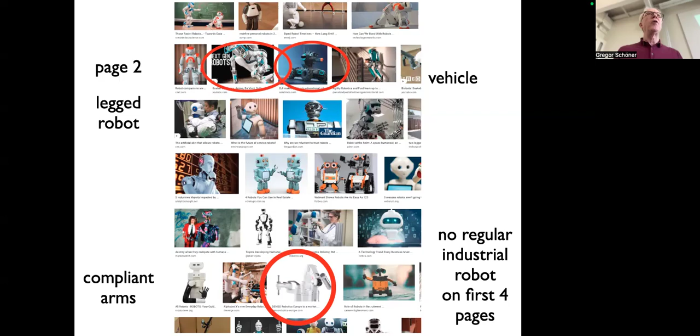And of course, most robots in the world are industry robots. That is, not autonomous robots. I'll say more about that. The huge majority in these autonomous robots are very special subfields. And this course is about autonomous robotics. I'll talk about that in a little bit. But that just shows that this robotics idea is very much tied to human-like behavior in the popular culture, right? And that's what people think, like these movies and so on.

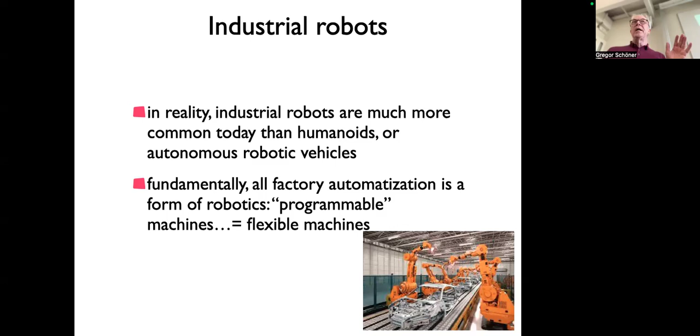And originally, the word even comes from a play, where somebody imagined a human-like agent that would look like a human, behave like a human, and so on. So this is part of the fascination always of this topic. It's not very much the reality. Now, this course is about autonomous robots, and they're not human yet, but they are sort of a theoretical answer to problems in artificial intelligence.

So industry robots are programmable machines. That was the feature, that they are flexible by being programmable rather than having a fixed function. But the information is given to these machines by the programmer, right? They don't have perception of the world. They're not basing their action on their own sensor information. For instance, the robot arm in the production chain would move to a location, and whether the part is at that location or not is then up to the factory engineers to make sure.

We had a project many years ago with Daimler, the Mercedes-Benz company, where the autonomy consisted of the robot arm having a little bit more tolerance for how precisely the part is positioned. So they had some camera, and then if the arm was like a centimeter off, they would compensate for that. That was then their notion of autonomy, very limited.

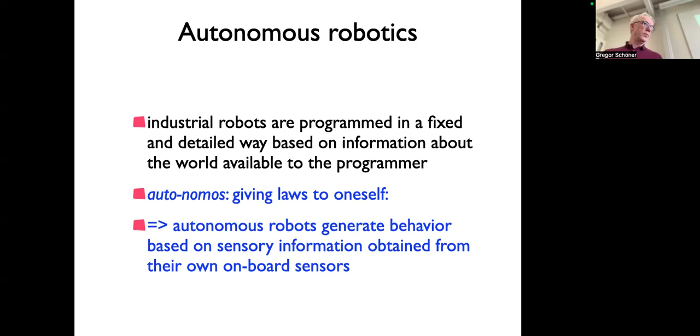So autonomy, the word comes from, nomos is law, giving yourself the law yourself. And what it really means is the notion that you're generating action, behavior based on your own sensory information, typically on board, from sensors, and you decide about your action based on that sensory information about the world. Now, again, this is ultimately part of the artificial intelligence vision.

So, for instance, the classical textbook of AI, Russell Norvig, the standard textbook in that area, has in the introduction this sentence here, that the unifying theme of AI is the idea of an intelligent agent, an agent that receives percepts from the environment and performs action, which would be an autonomous robot, right? That's sort of the original vision, even though in practice it's not always been like that. So yes, autonomous robotics is part of AI in that sense, right? But as you will see, it has more than AI systems because it has all these physical aspects as well.

Now, that is easily said, but if you look more precisely, then some of you engineers know there's autonomous control, which is the idea that you physically influence a mechanism based on sensor information, right? And actually almost every aspect of control has that feature, that it has sensors and controls based on sensors. So that's not supposed to be autonomous robotics. That's supposed to be just control. And so roughly speaking, this means that the autonomy in autonomous robots is supposed to go beyond that. And that's not entirely easy to formalize.

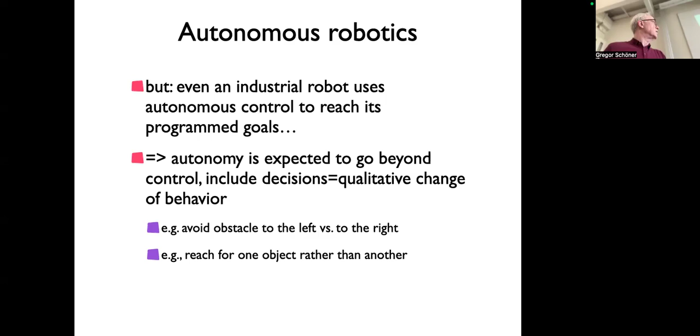And selecting the object that you reach for, that will be a decision. Well, if you're just looking at one object and you're controlling the precise grip, then you would say, well, maybe that's control. To formalize that more generally, again, is a little bit difficult, but that could be maybe the most elementary form of distinguishing between that. So that's what we're talking about.

There is perhaps often an intuition, like these humanoids and the robots in the movies, where that autonomy goes very far, and the robot does whatever it wants, right? And that is actually not at all what actual autonomous robotics is about. Actual autonomous robotics is about giving the robot tasks, not the robot figuring out itself what to do.

We actually, in one of our industry collaborations, we had these people saying, "Oh, you're crazy! The robot decides itself. We want to know everything the robot does and have control over everything." But maybe it can have a little bit of freedom, and if you look at it that way, then the robot needs to get commands that give it tasks.

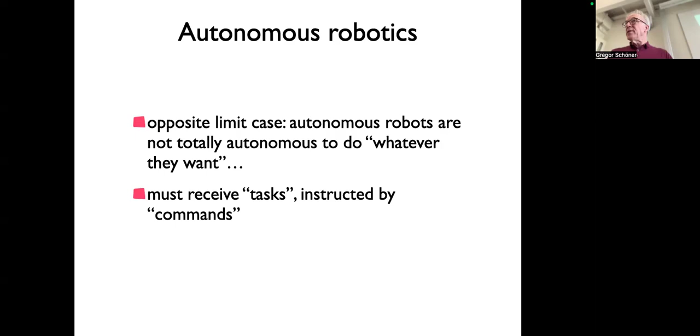And so one could actually say autonomous robotics is actually about having a high level at which you give a robot tasks. Now, the programmer would be telling the robot exactly which parameters, exactly which grasp, and so on. And then if you can give a task to the robot by just talking to the robot or pointing at an object, and the robot then acts on that, then you're using that autonomy, the fact that the robot has sensors and can maybe distinguish between different objects based on its own perception, as a high-level interface to that programming, right?

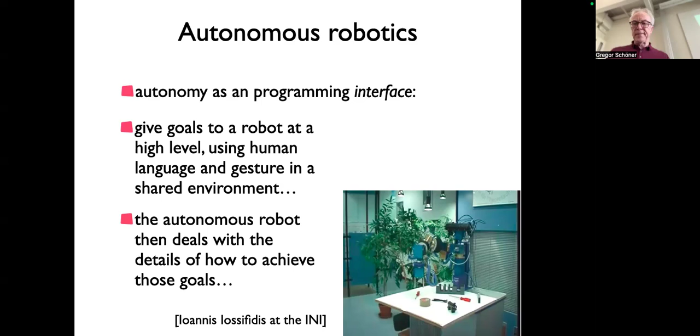So it's programming by human-level communication. And that's not an unreasonable perspective on autonomous robotics. So there's quite a bit of that. So maybe first to give a little impression, I have a few slides where I have just some photos and little videos of robots. I'll come back to that in the end. I'll make a more formal list of typical kinds of robots, and you get a little sense of it.

So there are simple vehicles. I actually own even one of those vacuum cleaners. This is mine. Actually, I have a new one now. It used to be mine years ago. And this is a couple of years old that I made that slide.

There are all kinds of things. They are commercial, right? You can buy them. They're actually quite good now. I mean, men typically think they're good, but some women think they're not good. It's an interesting topic. But they do simple tasks, right? And so this is commercial level stuff. There's much more of that now. These are vehicles. I'll come back to that.

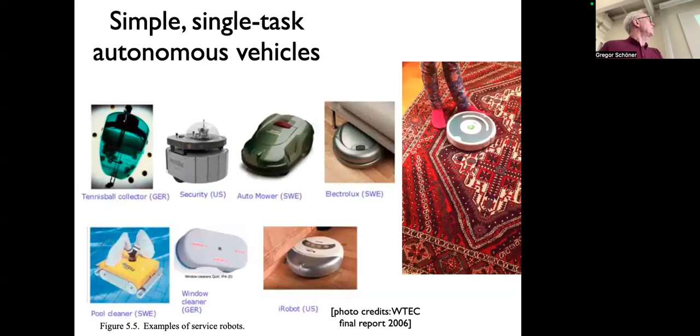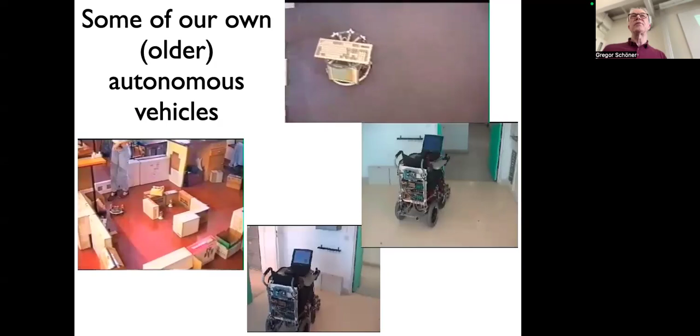It's important. Here are robots my team's built, and I'll come back to the two of them. We actually built an autonomous wheelchair, which is really cool in that it was really low level, really cheap sensors, which still didn't get it to be a product because of all kinds of complications in that market. But the others are just experimental. We'll come back to these later.

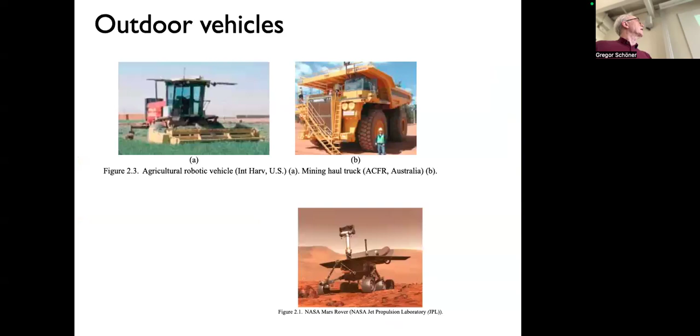And then all kinds of other kinds of vehicles, and you know that autonomous cars are robots, right? Because technically speaking, autonomous driving is robotics, and that's a whole field. I worked a little bit in that field for a while. I can say more about that. Maybe I'll do that actually off the record in an exercise session if you're interested. I'll not really teach about that.

Then there are these vehicles. I will address it a little later. So vehicles and arms are categorically different. And roughly, I always say the difference is vehicles are robots where the sensors move with the action. The actuator moves the body around, and the sensors move with the body.

For instance, if you put a camera into a robot hand, then that robot hand is a vehicle. That's how we define that. And that has real consequences for control. You can control a system where the sensor moves with the actuator in simple ways.

For instance, you can just say, I want to move it so that red stuff grows on my camera. And that way you will approach something that's red. You don't need to estimate where it is. You don't need to estimate the distance and so on. So that's called visual servoing. It's a manner of controlling.

While arms are robots where the actuator and the sensors are separate. Like you have a camera and then you have an arm. And that requires much more sophisticated kind of perception. And in the animal kingdom, almost all animals are vehicles. Most animals do the action with their body, with their head. Dogs, for instance, do most of the action with their snout, with the mouth, and they dig with their mouth. They do a little bit of paw action, but not very good.

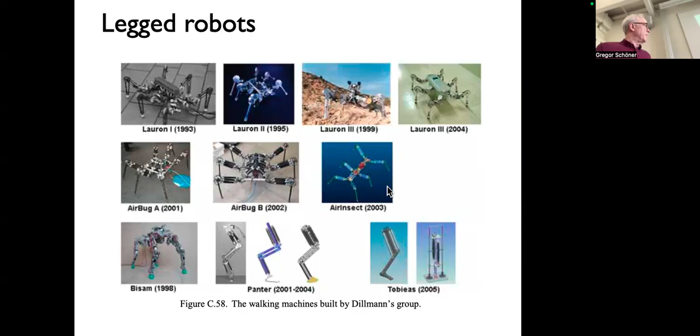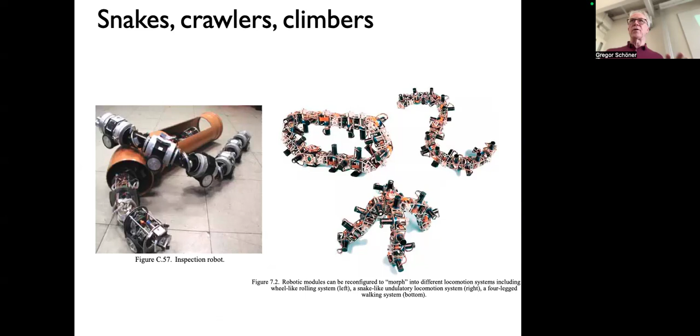So these are vehicles, and there's a whole area of work. A lot of these are biologically inspired. This is more for research purposes. And then there are specialized vehicles like crawlers or climbers and things like that. And these very specialized designs are interesting because the limitations that we have on autonomous robotics make the special purpose ones the most successful ones. And there are some really good applications, for instance, for robots that clean or even just measure stuff in underground tunnels, things like that.

And then there are boats, underwater and surface water drones. And then, of course, there are drones. Most drones that you now hear a lot about with the warfare going on in Europe are actually not autonomous. So autonomous drones are a special subclass, but there is some work on that as well.

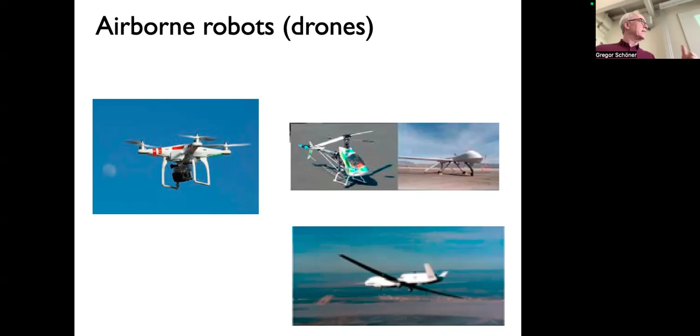But be aware that almost all flying is not actually doing obstacle avoidance. The most elementary form of autonomy is obstacle avoidance. And that is something that almost all flying objects don't do. It's just manual control. Somebody keeps track of all planes and tells you how to go. So even obstacle avoidance is still a topic of research in this field.

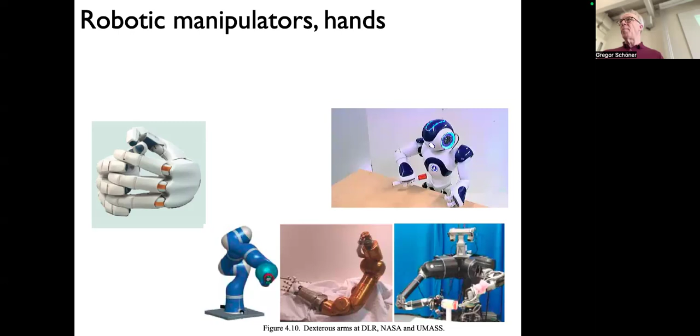Yeah, and then the robot arms. Now there is work on hands, very primitive so far. So I'll say that in a moment. Interaction with objects is a real problem in robotics. I'll come back to that. So this is an arm that we have downstairs, and we're not actually doing a lot of work with it now, but it's a very cool robot arm that has torque sensors and is sophisticated.

And this is the old version. We no longer have that here. Or is it maybe still here? I don't remember. The old version was like a home-built version of this top one.

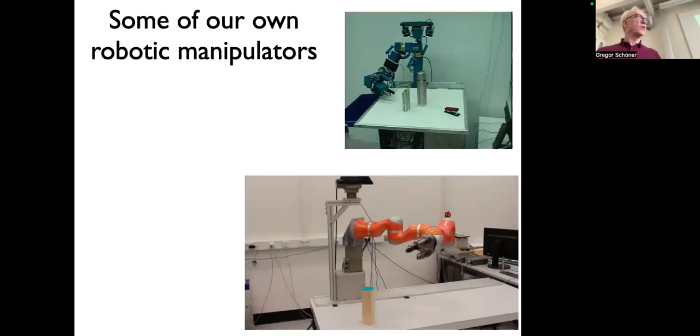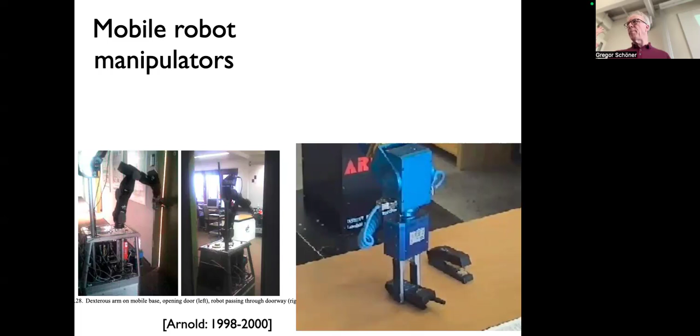And then you can actually put an arm on a vehicle, and then you have both. And that's sort of the holy grail. These humanoids are supposed to be like that. They walk around, they are a vehicle, but they can also grasp. Now you might see all these popular videos about humanoid robots, like the Elon Musk show and all this. This is always just a vehicle, and then they wave the hand a little bit. They're not actually able to direct grasping action at objects. So actually, as arms, they are totally useless.

And so that's differentiated. Okay, so just to put that in your mind, and then at the end of the lecture, I'll show you the handbook of robotics and the classification of robots, and you can have a little bit more of an academic grounding here.

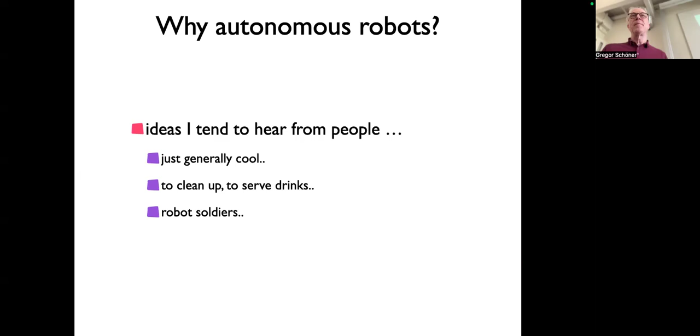So I have actually done a little bit of an informal study at some point. I mean, not a scientific one, but I made a systematic effort to ask people what they think. Got these kinds of answers: it's cool, or they can serve drinks and stuff like that. And then robot soldiers is the most reproducible answer I got, which actually makes sense. I'll come back to that.

So in practice today, autonomous robotics is not deployed except for vehicles. I'll come to that as well. Actually, the most deployed are toys. So somewhat useless in the sense that they don't do anything physical. They just have a body and do things. There is surprisingly much interest in that.

There's a whole research program at the EU level about robots for autistic patients who, for some reason, which I'm not sure is understood, have an easier time playing with the autonomous robot. That is viewed as a possible way of how to make these people a little bit more active. And there are some ideas that elderly would use robots. I don't know what that is.

But that's kind of easy because the task constraint is not very serious, right? As long as it does something, is a bit reactive, it might be fun. So that's a whole branch, and some of these products used to be on sale, like the Sony dog, maybe no longer known. And then they went out of sale because the behavioral repertoire is so limited, it gets boring quite quickly, and people weren't really buying it as much.

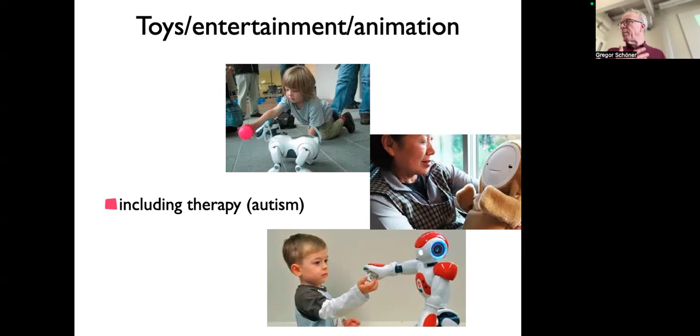So that's one line. This toy issue is quite prominent in Asia for some reason. I don't know, some cultural affinity perhaps. Here in Europe, there's a lot of work on assistance robots, so robots who interact with humans and support humans. This is very typical social thinking in Europe, so a lot of the funding programs in Europe are around that.

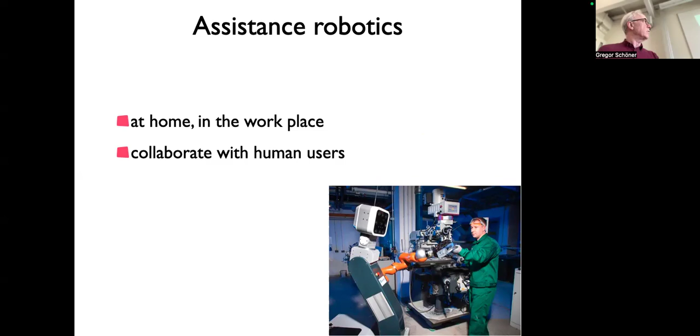So assistance robots at work and even home care and so on are very far from being deployed. I've been in projects where at the end of the project, we'll have this prototype, and it's never really worked. So this is a very, very difficult problem, and you'll learn a little bit more in the course why that's so difficult.

Military is, in a sense, the most rational application, because in the military application, not having the human there makes a lot of sense. In other cases, it's a real question: just to eliminate a job, is that really what you want? Like a caretaker, you want to eliminate the job, is that really worth it? But in the military, of course, it's very interesting to take the human out of the battlefield. So that makes a lot of sense.

And the autonomy aspect is interesting because remote control is vulnerable. We see this now in the Ukrainian war, that there are countermeasures and so on. And so there's a lot of research. The US has been leading, and maybe other countries which are not open. There's been serious investment into this. In Germany, somehow it's taboo. Germans have a special thing that we somehow pretend that we don't need the military. And I'm not teaching about that.

There's a famous person in the field, Ron Arkin, who developed a particular approach that I refer to, who actually did a lot of work with the military, and some very interesting stuff exists, but it's not very well known. Some of it is published, but not a lot.

So these DARPA challenges that some of you might know about, a lot of YouTube videos are about that. DARPA is the American funding agency funded by the Department of Defense, but they defined robot competitions that are not military in nature, to stimulate work that would ultimately lead up to the military. So they are driven ultimately by that vision of making military robots. And there are interesting ethical issues I'll not talk about.

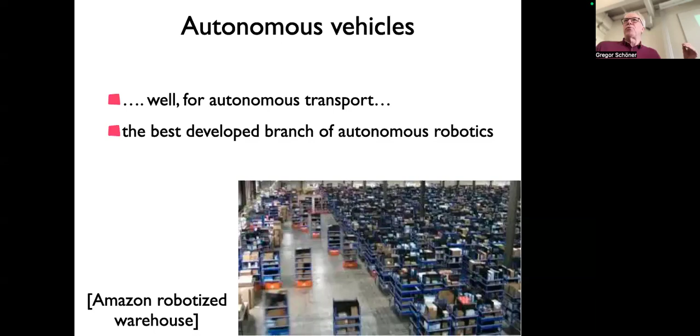I was in a certain kind of committee at Volvo. The Volvo trucks and Volvo cars have a joint research company where it was more about driver modeling, and we really saw the discourse change from saying, "Oh, autonomous driving in 5 years, in 10 years, in 5 years, and then maybe later." And so currently, I think it's still a bit unclear if we get there, but in special cases we get there, right? There are autonomous vehicles on factory floors or in special environments and so on. But the problem is always this last percent or 0.5% of cases that could lead to accidents that you're worried about. So that's maybe the only area where it's really the product itself that is the goal, right? In other cases, it's sort of indirect.

So the truth is that it is so far just a research field. It's a playground for research, and there's some intrinsic reason why that's interesting. And this course is more about that. It's not about applications of autonomous robots. So it's an interesting research field. This was from one of our projects where the whole point here is that the object is moved just a little bit while the system is grasping, and it can adjust to that. And that is a huge effort to get that right.

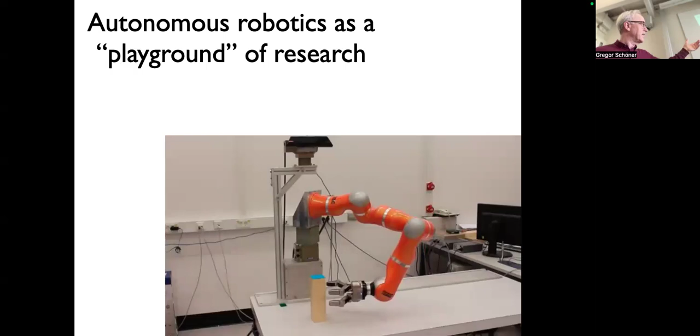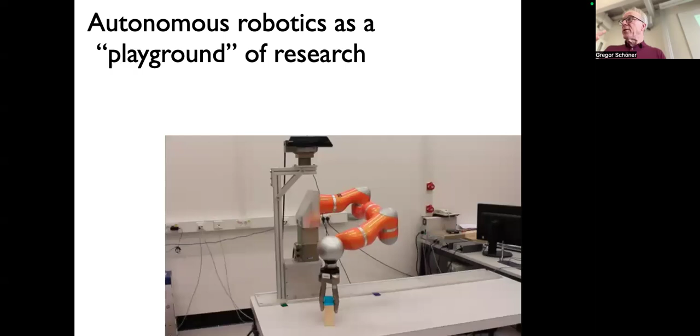This is actually a case where this is just a big dynamical system. So there is no program other than numerically solving the equation. And it can still do these sort of discretely looking things. So that's really academic, right? That's research on a principled question that we study. And so that's interesting in a way because it captures some fundamental challenges in engineering. So one of the modern forms of engineering that permeates all of engineering is essentially that you model everything until what is not modeled is only noise, and then you have a good theory on how to deal with that.

And that's where autonomous robots are an interesting challenge, because you could say almost by definition an autonomous robot operates in an environment that I can't model. If it can be modeled, it's no longer autonomous. Then I have the information about the system, or I have some parameters that I need to estimate, perhaps. But other than that, everything is not. And you could say, well, natural environments are defined as environments that I can't model, or where the model is not very good. And one component of such an environment is a human being.

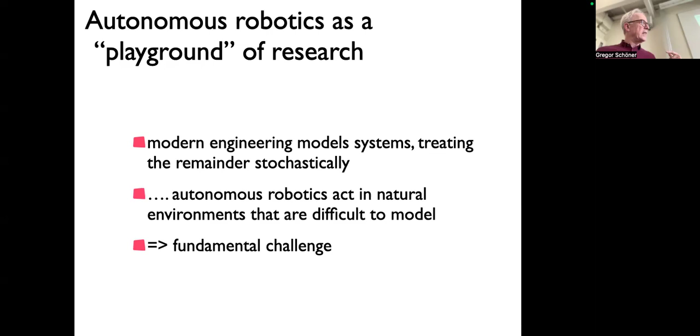If you're interacting with a human being, it's very hard to model a human being because they behave in a funny way, and it's difficult to limit what this human does, and therefore interacting with a human requires working in a place where you don't have these very good models, right? I mean, you still have models, but not as good. And so addressing that challenge is one of the motivations of doing autonomous robotics.

And the other is ultimately system integration. So robots consist of a lot of different things, I'll come to that in a moment, and of very different kinds, and they all need to work together. They are a very good exercise in that. That's one reason why you often see student projects being about building autonomous robots. Some of you might know there's this robot soccer league, and there are robot vehicle competitions where teams of students from universities compete. And one practical, didactic motivation for that is that the students learn system integration, because they have to build the hardware, the sensors, the computing, the communications, and the programming, and so on.

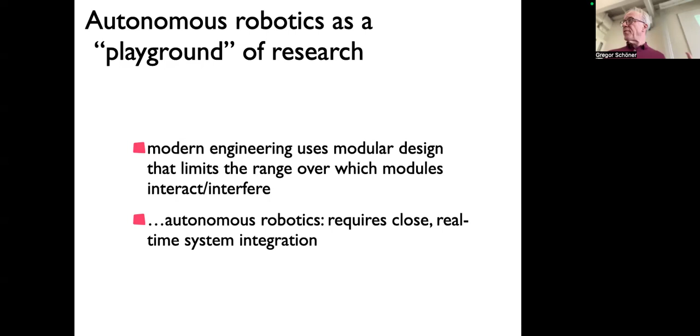And all of that needs to work together, and that's a very good exercise. So, robotics, autonomous robotics, is inherently extremely interdisciplinary. That's certainly true about even just the hardware. There are very different kinds of hardware in there: digital, analog, sensors, communication, networking.

But then also even going to human factor things, safety issues, even ethics issues, the whole energetics, which I'm not going to talk much about, but it's a real constraint, how much power you need. For instance, prosthesis work with the idea of having intelligent prostheses. But if they use a lot of energy, they're heavy, and you don't want to have to tell the person, oh, you can only use it for 2 hours, and then take off that arm and take your old arm. So you see there's a lot of challenges.

So it's a very interesting research field. And that's really what it is. Good. That's a bit of background. Now, in the rest, I'm going a little more into the research and then pointing to what we actually talk about in part during this course.

First of all, just as a matter of clarifying terms, I'm speaking quite quickly in this introduction, right? This is not something that you're supposed to all have to remember later on, but interrupt me anytime, right? I know it's hard to do, but feel free to do that.

So just for reference, because I will sometimes refer to that: architectures. Architectures are ways of how all these different mechanisms are bound together, right? System integration would then be organized around an architecture. And the classical one that was developed in the 50s, when this field became concrete, when people started to actually work on this, was the Sense Plan Act framework. It's not one architecture, just a general framework. And that is still very dominant in discourse and thinking. Of course, they're much more complicated now, but roughly speaking, it's still very much like that.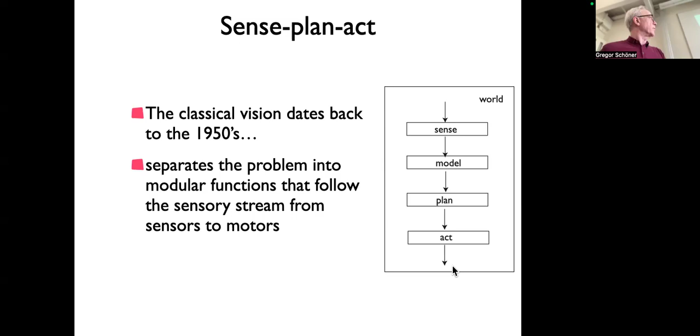So it's essentially organizing the robotic components along the sensory stream from the environment ultimately to the acting on the environment. A robot acting in the environment then senses the consequences of its own action, as a vehicle directly because it gets sensor information, but even as an arm, it will see whether the object it grasped moved or whatever it is. So it just follows the sensory stream, and roughly these 4 stages, where sensing and acting are essentially the parts that are shared with conventional control, right? The sensors would be the sensors that we also use in control. And then the actuators were very good servo kind of systems that achieve certain physical states.

And the intelligent part, the AI part, would be here, this inner part. There was the notion that you integrate all the sensor information into a world model, of different kinds, and that based on that world model, you can then do the intelligent part, maybe planning, achieving goals by planning based on that information. And then the plan is handed down to the action.

So a lot of people said that failed, even though, frankly, it's still the framework that we use. It was much harder than initially anticipated because historically the difficulty of extracting meaningful information from sensors was way underestimated, because we didn't do that so well. It was kind of intuitive that you could do that, and people started with very simple worlds, the block worlds, where there were just some cubes whose parameters you would have to estimate, but it didn't scale very well at all. And this is now still called the challenge of perception. I'm deepening that in a moment. And that made arriving at that world model quite difficult.

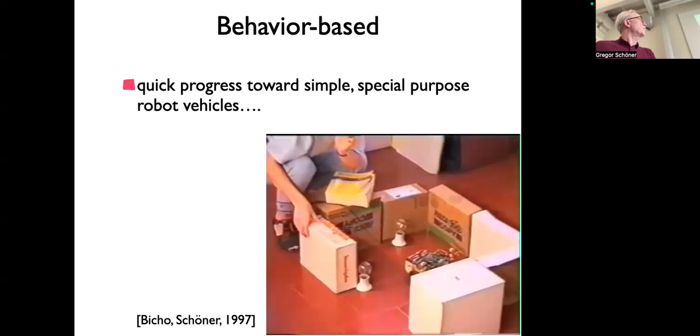That was initially very successful because it did lead to very quick progress towards some simple vehicles. And I'll present next time or in 2 weeks this little system here, which we built in Marseille a long time ago, which is extremely primitive. It had like 100 lines of code and actually performed pretty well. It was looking for light sources and avoiding obstacles. This is a laboratory thing, but there were some success stories with that.

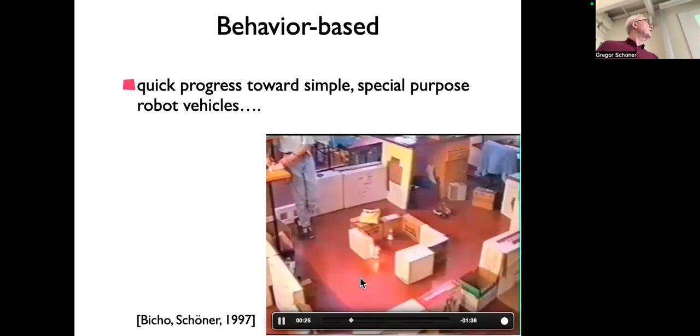The problem was they didn't scale so well. So if you want to make the task more complex, then ultimately the old problems were still there. And so it has faded a little bit as a revolution, even though there are still people developing this. And actually now the state of the art is that these behavior-based systems are always included.

Typically, you have a complicated architecture that does all kinds of world modeling and reasoning, classical AI. And then at the interface with the actual world, with the sensors and the actuators, you have a little behavior-based system. So it's like a filter for the low-level stuff. So this is actually this architect whom I mentioned who does some military work. So this behavior-based stuff is very real, but it's not the only thing. You pretty much have both.

So I already hinted that there are remaining challenges. And if you go to a robotics conference, there's discussion about how many and are they all different and so on. But roughly speaking, perhaps these 4 areas could be viewed as the most challenging at the moment. So the one is perception, I already mentioned, and I'll step through these very quickly. I should say this because I assume some of you don't know what perception is other than the daily life word, right?

And so perception is really about the world, estimating something about the world. It's not image analysis. It's not looking at the stimulus. Now, sometimes in the laboratory in psychophysics, you ask people to do very simple things, such as detect a line or the orientation of a line. Then it looks like it's about the stimulus, but that's not the case. In fact, the stimulus is the stuff that impinges on your sensory surface.

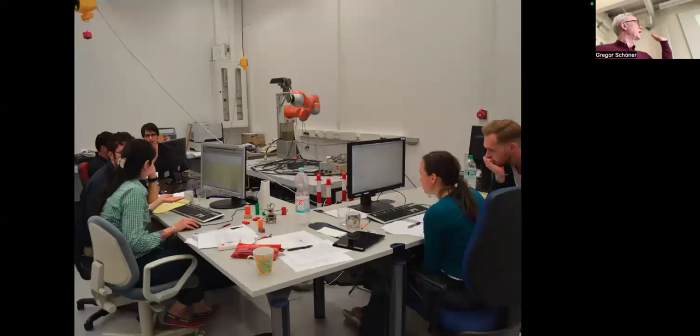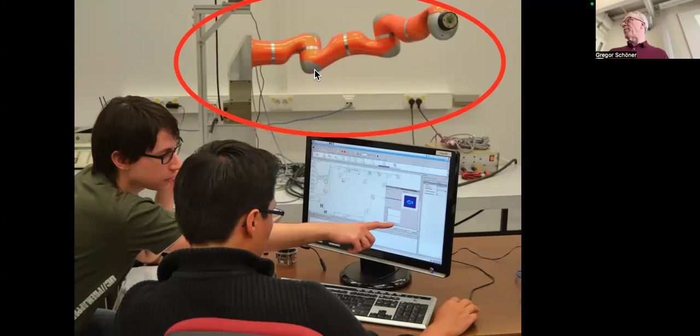I flashed this little thing here, for instance, and then you might recognize there is the robot arm that I showed earlier. In a somewhat funny pose, you might be able to classify that, see that, and maybe not look at all the other funny details here on this table. Because you will also pay attention to the fact that humans are very attracted to looking at humans. And you might also be able immediately to see that that's the same robot arm, just in a different pose, just in a different angle.

So this illustrates already three things about perception, namely that you are able to attend to things, that is selectively look at something, typically because you have a goal. Right here, I was kind of priming you to look at robots, and you saw that robot, and maybe you're looking then at the robot. If you're looking for an extension cable, you would look at that scene very differently. There were a lot of extension cables there on the table. And so you're searching for information. It's actually not that you're just sitting there and the stimulus comes in, right? You always have some task in your mind.

So that's one area that is not very well developed. All this deep network stuff. Some of them, transformer networks, claim they have attention. It's just a different use of the word. It has nothing to do with this kind of attention, spatial attention. So this is something that current computer vision work, in spite of all the progress with deep learning and transformers, is not good at. But there's a lot of work on that.

The other is detection and classification. That's where they are much better, even though these systems will not typically be good at localizing and segmenting the object. And then the third is pose estimation. When you interact, then you have to estimate not just that it's a bottle, but also really how to grasp it, right? That will be ultimately figuring out how it's oriented, where it's located and so on. So this is still a problem.

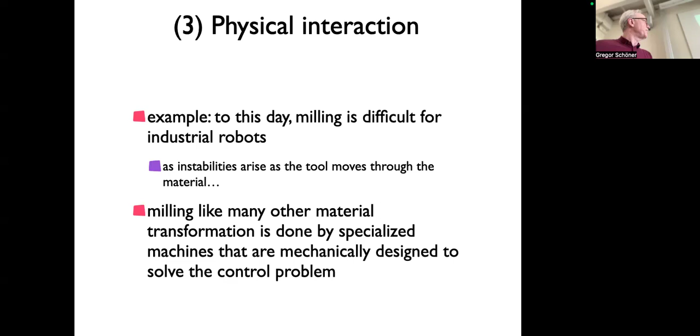And one thing of doing something physical would be with a human, right? Maybe like the idea of lifting a patient, or helping someone to get up, and like in prosthetics or assistance robotics and so on. And that would require doing it softly, not killing the human by misestimating exactly where it's positioned. So that's a topic of a lot of research.

So this fact that robots are so dangerous has to do with that, right? Robots are very strong. They are very strong typically because of their limitation in control. Their own action creates disturbances, and they have to counteract these disturbances, and they need to be strong to do that. But then if they misestimate and there's a human in the path, they can kill the human. And so they're unsafe. And so doing this in a more human-like way would also solve that problem.

And so one approach is soft robotics, a strong field of research, where you make the actuator soft. In principle, you make it weak, and therefore it couldn't hurt, and it can have some built-in compliances. If you don't quite figure out the right position, then at least you're just going to be deformed a little bit and then still act. And that's how we are as humans. We have muscles. Muscles are weak. And in a sense that one can make precise. And that changes the nature.

So I need to limit how much I say about that. We'll have a whole lecture at the end of the course about how muscles are weak. And so the fact that muscles are weak means that we don't usually hurt ourselves, right? You can run into stuff. If you fail on obstacle avoidance, I fail all the time. Cups, throw them over, and so on. But usually I don't break my arm because the amount of force I generate is limited by the fact that my muscles are relatively weak.

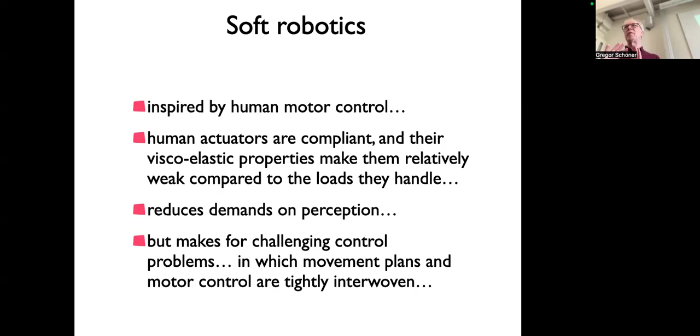And that's a very different style from the style that we do that in current robotics. The fact that most robots are not soft actuators, that they really have electrical motors that can be controlled very well, makes them very fundamentally different from human movement. And people are trying to emulate that. Good. So that's a big area. This was the physical interaction area, right?

And then background knowledge is maybe the final frontier. Background knowledge goes back to AI. It's still considered to be the core problem of AI. It got a little bit out of focus now with neural networks, with neural AI, where people think maybe it solves that. I actually don't even think it does. So that's implicit knowledge, often not even formalized knowledge about the world, right?

You all have that knowledge, how to do something, how to open a door. If you have a robot to open a door, it's like a doctoral thesis to get it to open a door, and then you change the lock on the door and it's another doctoral thesis, roughly speaking. So there's some physical knowledge of how to actually do that, and there is some kind of informational knowledge. Knowing that milk is in the fridge is background knowledge, right?

And children learn that, and how to grasp a bottle when you don't want to spill it versus when you want to use it as a weapon, and all other things like that. I used to give this example of soccer playing. Of course, you have to know the rules of soccer, but you have to know how slippery the ground is, how fast you would accelerate, how hard to hit the ball, or to tackle someone, how rough you would do that, so that you don't get penalized.

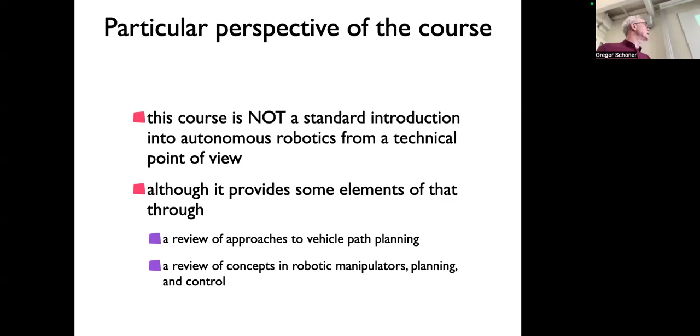Okay, good. So the perspective in this course is to emphasize sub-areas. So this is not a complete course of everything in autonomous robotics, of course. It's also not conventional in that I give equal weight to the different things. I have a particular perspective that comes from my research. So it's a research-based course, but I also give some textbook examples, so a bit mixed. So I have a syllabus.

So let me first show the syllabus here. So roughly, these are the topics that are covered. Actually, I'm not doing the dynamical systems tutorial. I'll just do it in an exercise. So I'll talk about vehicles for about 3 or 4 lectures.

I'll talk about a particular approach to vehicle path planning, so how vehicles move, and the attractor dynamics approach, which was developed in my lab. And then I compare that to other approaches. And then I'll talk a little bit about navigation. That is ultimately the SLAM problem, but not in a very technical way.

I'll use that actually to make an analogy with human movement. And that's sort of a theme throughout. In these examples, I always compare how humans behave versus how these robotic approaches work. For instance, this attractor dynamics approach was used to describe human locomotion.

I mean, the displacement, right? Not the leg stuff, but how you actually move around the plane, how you avoid obstacles, and how you go. It's used sometimes for describing pedestrian traffic, how they behave. And the robotic version of that is the attractor approach.

And then in the second part, I'll talk about arms, and I'll give basic lectures just about arm kinematics and things like that. But these are just like a textbook, but then condensed into like half an hour. Like you get half of the textbook in half an hour. So in other words, it's just a survey. But then I'll emphasize some aspects that are, again, from analogy to humans.

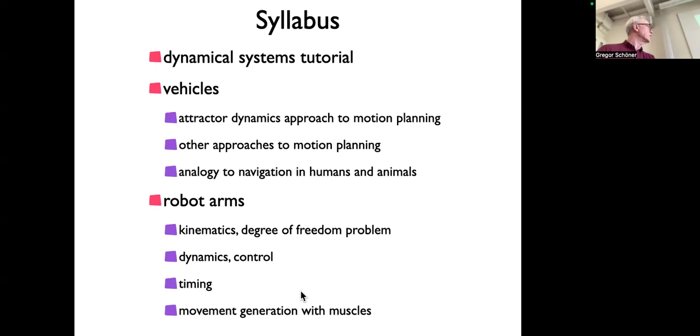And then in the end, it will be what's called control, sort of dealing with muscles and forces and so on. I'll make the analogy between muscles and the conventional ways of control. So that's sort of the survey over what we do. And so the particular perspective is dynamical systems play a big role. So across the board, we will be using dynamical systems as the mathematical language in which to look at that.

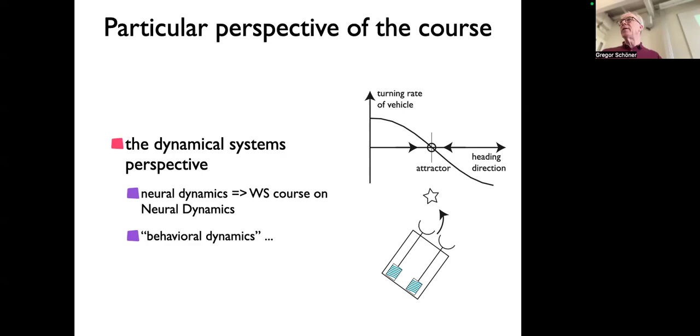So that comes from the work I do in the other part, in cognitive science style, which also is based on neural dynamics. So the neural networks described as dynamical systems, and here it will be not neural networks that are described this way. It will be specialized dynamical systems for these different subtypes. And so you will learn something about dynamical systems, or I'll reactivate knowledge you already have, hopefully.

This is a major direction of research in this field. So Daniel Koditschek is one of the pioneers and sort of a big name in this field. He wrote a very interesting article a few years ago, but I think it's impossible for you to read it. You can try, you can look it up. Just aside from his abstract where he lists sort of fields of research and he thinks that really developing dynamical systems theory is one of the

research challenges. And he means by that dynamical systems ideas that cut across all these different domains, that do not just control, where it's very traditional, but also do that in planning and even do it in the interaction with the environment, both perceptual and physical interaction. So that will be really the main tool in the course. And I'll review other people's use of that.

So we use a particular approach with attractors and bifurcations, but other people like the potential field approach use, I would say, simpler forms of that. And then, of course, classical control and the mechanics, the mechanical description of the physical dynamics of an arm. It uses dynamical systems in a more conventional sense of conservative dynamical systems.

And I will not teach that in a very technical way. I'm not asking you to make computations and compute eigenvectors and things like that, but to develop a conceptual understanding and intuition for these kind of ideas.

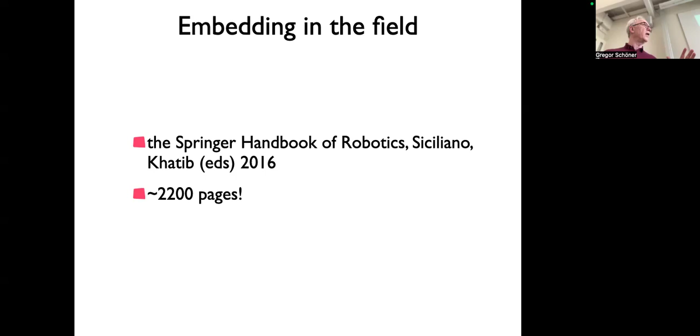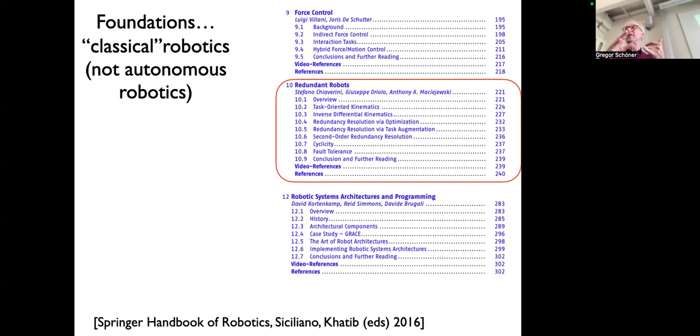So these 12 are the fundamental chapters they have in here. So these 11 chapters are actually classical robots, that is, not autonomous ones. This is what's shared with classical robots, right? That are programmed, but you still have to deal with kinematics and dynamics and control and so on.

Now, autonomous robots, among the foundational chapters, they have behavior-based systems, and I will be showing you robots that are roughly behavior-based in their architecture. So I'll touch that a little bit. I will not talk about AI reasoning methods for robotics. Actually, Michael Beetz is a German working in Bremen who wrote this chapter; I actually have some connection to these guys. We had a joint project with those guys, but I'll not talk about it.

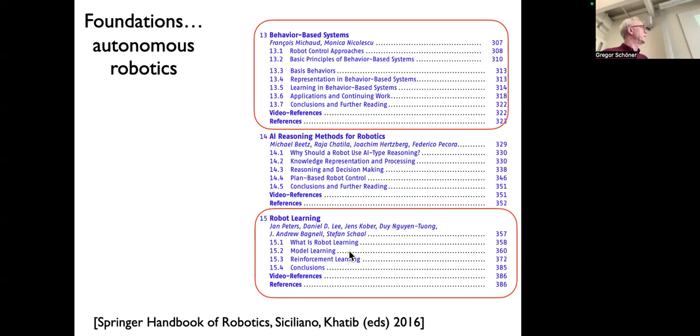And I'll not really talk about model learning, but I might have a chapter on movement primitives, which is from that group. I just don't know if I have the slot for the movement primitives lecture, but if I find a slot, then I'll put that there. So that's the foundations, right? We cover about half of it, but very crudely, because usually these are many different courses that you take here. Now, the second part of this is about design, all the different robot designs.

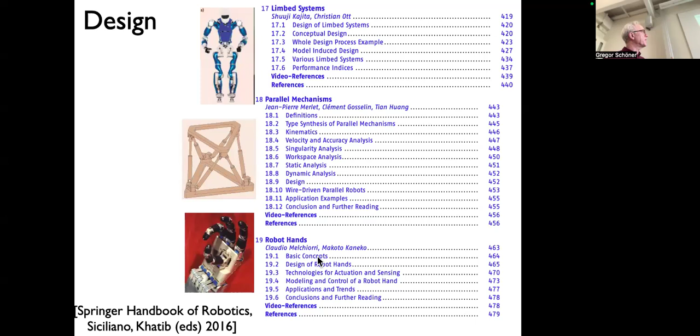So I already showed you some, right? The limbed system is a chapter. Parallel mechanisms, like platforms. No, I'm not talking about that, of course. Robot hands is a topic. So I'm not covering any of these, just to give you a sense for these different things. So snakes and continuum robots are a typical design. This is soft robotics, so the muscle-like stuff. I'm not technically speaking about it, but I'll talk about actual human muscles.

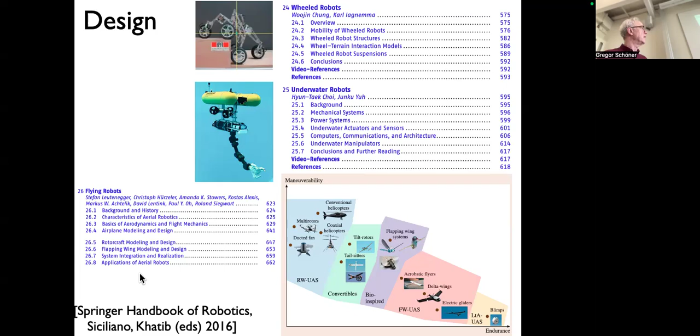Biologically inspired and modular robots, and then wheeled robots, underwater robots, flying robots, and then there are what I'll call micro robots, which work on very special mechanisms that will be not conventional rigid body robots. So these are different robot designs, and I'll just use some examples, but I'll not work systematically on how to design robots.

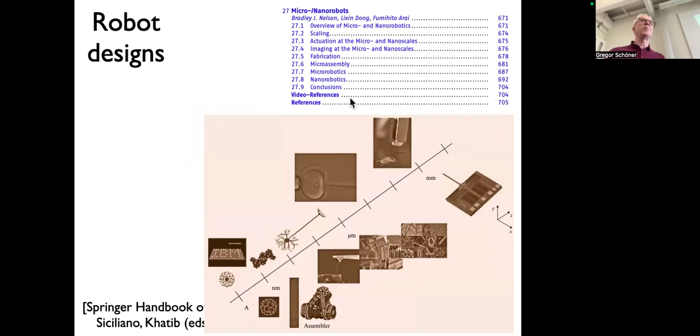The third part of the book is about sensing and perception, and I'm not covering it. I just want to give you the sense, right? There is work on force and tactile sensing, inertial sensing, GPS odometry, sonar sensing. We've actually used sonars at some point. Range sensing, so distance sensing, 3D vision in navigation and for object manipulation, object recognition, visual servoing. I briefly hinted, you can do visual servoing by putting a camera into the hand and then you simplify the grasping problem.

I'll not talk about multi-sensor data fusion. And that's it, I think I might have missed something at the bottom. So I will not cover perception very much in this course. Then there is a lot of work on manipulation, interacting with objects, surfaces, so manipulation tasks, contact modeling, grasping, cooperative manipulation, so two arms or more, mobile manipulation, so robot arms on vehicles. Actually, Marc Toussaint is a former student here of the Institute who is now in Berlin. And then haptics, telerobotics. None of this will be covered, right?

And the fifth part of the book is about what they call movement in the environment. This is ultimately vehicles, right? What I call vehicles, when the sensor moves. So we'll be talking a little bit about motion planning. That will be the opening. Motion planning, obstacle avoidance. That chapter, I might even give you an excerpt from as a reading.